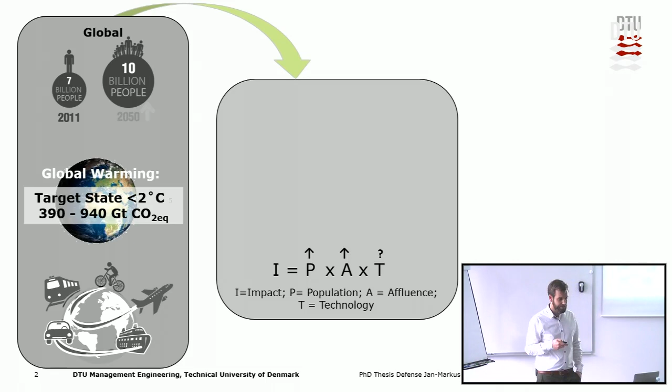And if we combine this now to the product which I'm focusing on around this PhD thesis, we can see it actually today how this works. So car companies are trying to introduce electrified cars now to the market, so they're changing their technology. But does it actually reduce the environmental impact by using the electrified cars?

Just to remember, over a life cycle, a car emits roughly 38 tons for 200,000 kilometers and 10 years. And if we look now at electrified cars, there will be a shifting from the use phase of the emissions to the manufacturing stage. But how much can we actually emit? That is the question. Which CO2 budget is actually allowed to have a stable or a lower impact to the environment?

That's the whole question of my PhD thesis: how we can combine the global aspects, the product, and the manufacturing, and how much CO2 emissions can be assigned to manufacturing.

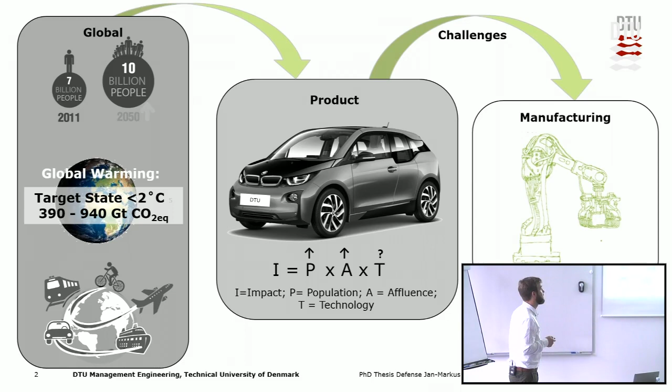Along this way, car manufacturers have to solve a lot of challenges ahead, like stakeholders asking for cheap production, or politics asking for the introduction of additional regulations and so forth.

And of course, we have to think about the rebound effect as well. Car companies are always striving for more cars - they want to sell more to earn more money. But this means additional emissions during production. So this is called the rebound effect.

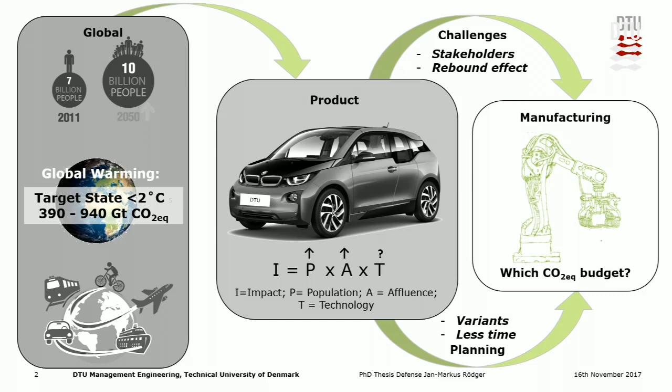And then we have the planning, which is important because we have to plan the production line according to this new CO2 budget. But car manufacturers are producing a lot of variants now. If you look at the Golf car 20 years ago, there were only 4 different variants, and now there are up to 100 available.

And then, of course, the planning should take less time - it's a kind of economical pressure from the stakeholders. So this is the whole background around my PhD thesis.

And now I'm getting into detail and would like to present the agenda. In the beginning, I will talk about my research approach, then the actual method development. After that, I integrate the method into current assessment methods. Then I will apply it in highly automated manufacturing, so I will generate actual results here. And then at the end, I will finish with the conclusion and recommendations.

So let's start with the research approach, which is always quite important in a PhD, to do some research. And I would like to scope my thesis a little bit.

As I mentioned before, I have dealt with the target states, environmental and economic, but I will focus on environmental or CO2 emissions in this presentation. So the first research question, which I solved in paper 1, is: how can sustainability be assessed in automotive manufacturing using the concept of target states? So how to implement 390 gigatons into the production planning.

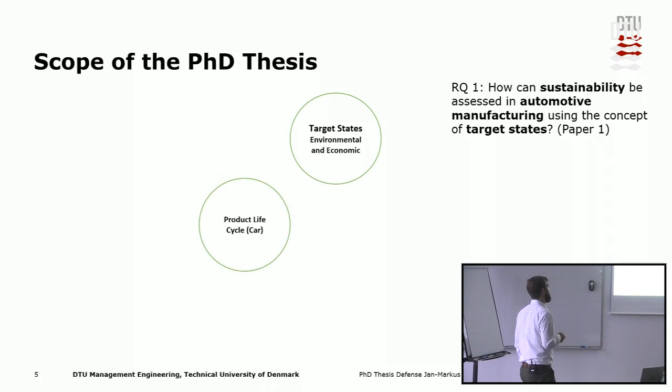The second part is the product life cycle of the car. It's quite important to implement this new thinking into existing simulation tools, because car manufacturers are using a lot of simulation and trying to speed up the planning process. So I've tried to integrate life cycle assessment into production simulation to avoid actual sub-optimization - so the burden shifting from one life cycle phase to the other.

And then we have the third part, which is about product and production planning. So I had to understand the production planning process in car manufacturing and how a target state for production can be integrated in the early phase of production planning.

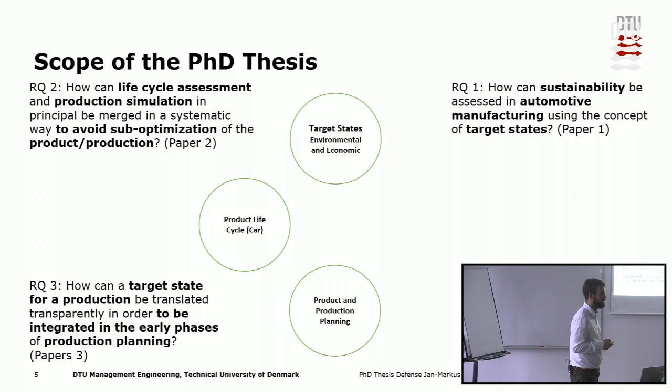And the last question is how I can actually assign these target states to the individual processes in a body shop production - so what CO2 budget should be assigned to robot XY somewhere in the production line. After I solved all these questions, I'm pretty happy that I've developed a sustainability assessment method for automated manufacturing. How I approached these 4 questions will be the content of this slide.

So the first part is the method development, and it's the answer to research question 1. I started with the aim of having a holistic framework for sustainable manufacturing. And I did a literature review in the beginning, gaining a lot of knowledge about how to assess sustainability in manufacturing. Then I talked to the partners in the AREUS project.

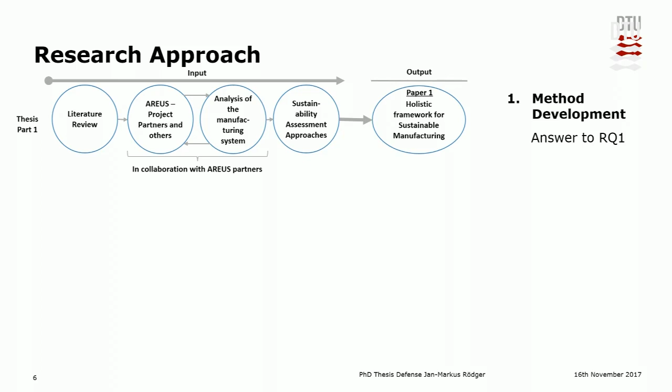The AREUS project is mainly a EU-funded project which lasts from end of 2013 until 2016. The idea of the project was to assess technologies in highly automated manufacturing, so it somehow fits pretty well to my PhD thesis.

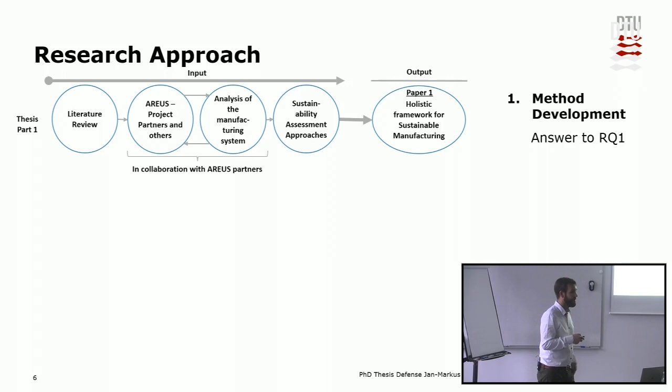And then I was lucky enough to analyze their manufacturing systems, so I gained additional knowledge. And then I added some sustainability assessment approaches, and at the end I had a holistic framework. But I will talk about this in detail later on.

The second part is the integration in current assessment methods - this method somehow has to be applicable. So I collaborated with TU Brunswick, and we combined life cycle assessment and manufacturing simulation in this part, and we were able to integrate this into current simulation software.

The last part, which is the most interesting part I would say, is the application in highly automated manufacturing. So I did a review of production planning of a body shop and collected a lot of primary data in collaboration with the AREUS project again and with the University of California. And then I integrated these two approaches and developed, at the end, an algorithm which can derive life cycle targets for the body shop.

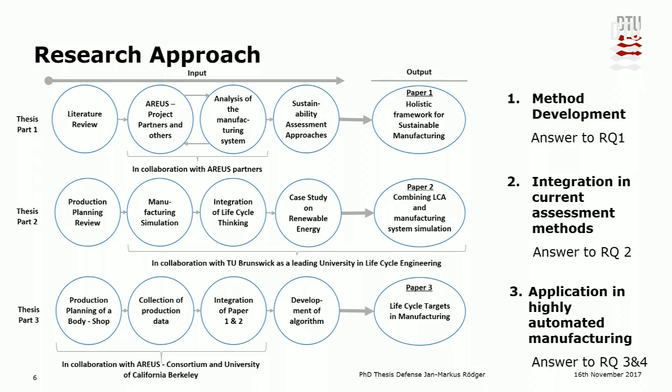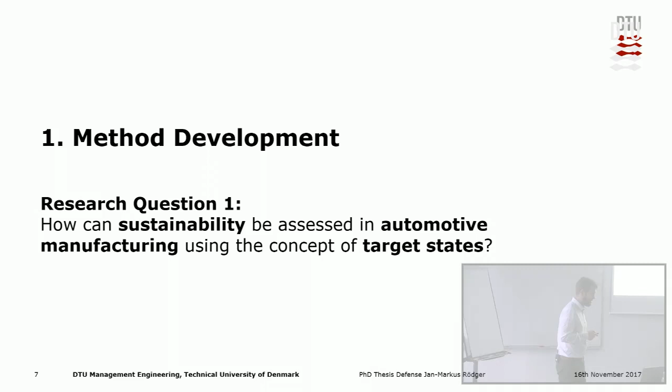So the question I would like to answer now is how can sustainability be assessed in automotive manufacturing using the concept of target states? For me, it was always quite important to work with industry, so of course we had the key partners of the AREUS project, which were KUKA, Daimler, and Siemens.

Along the way, I had the opportunity to talk about my approach with Tesla in California, with Danfoss as one of the partners in AREUS as well, but they were not really into car manufacturing, and then with Volkswagen, and they were pretty helpful. So I could mirror my approach and see if it's a good, applicable approach, because I wanted to develop an assessment method which can be applied in an actual manufacturing environment, and not just another method for the drawer. That was my idea.

Based on this collaboration, I was able to derive objectives for the new sustainability assessment framework. In total, I have derived four objectives. The new framework should address the full scope of sustainable manufacturing, meaning we should relate the impact of the product to the production development. Then it should reflect global targets, like the planetary boundaries concept, which somehow describes the carrying capacity of the Earth, so how much we can actually still emit.

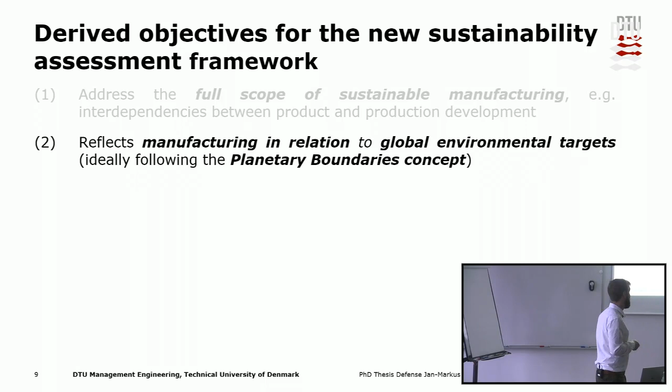Sustainability should be understood as a relation between three factors: the demand from the customers, the so-called functionality, the product, and the production system, but it has to take the life cycle perspective always into consideration. And then it should be able to integrate target states to the very last production station.

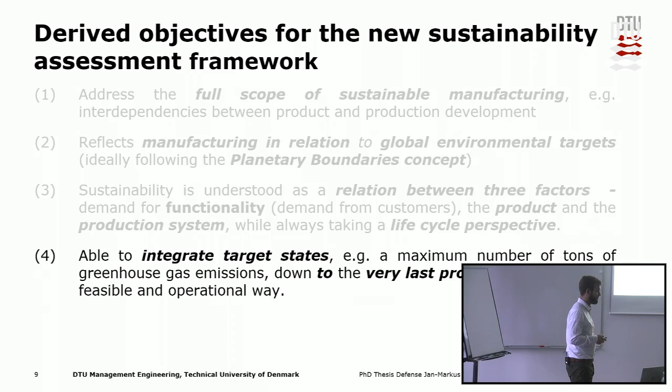The second part about the background of the new framework is the derived requirements from industry. So it should be aligned to the existing decision-making process, it should fit to the existing product and production planning processes, so it has to be a top-down approach. Then it has to be transparent, so that all involved managers know what kind of target they should use.

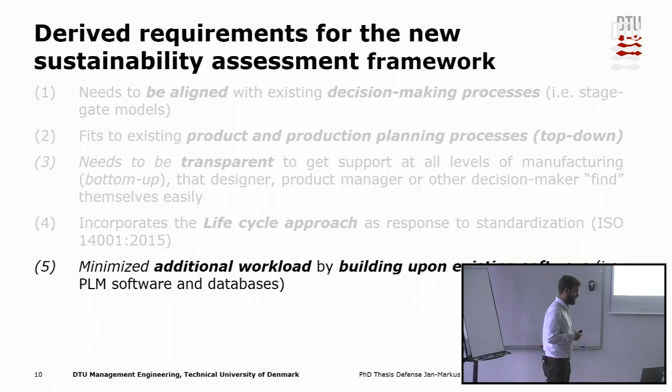Then it should incorporate the life cycle approach, because the latest ISO 14001 said that the life cycle approach should be considered. And then, which is quite important for car manufacturers, they don't really want additional workload, so it should be built up on existing software. There are a lot of product lifecycle management softwares available, and the framework should be integratable to this one. And cost-benefit ratio is kind of obvious for car manufacturers.

And the result is the so-called sustainability cone. If you remember that we should integrate the demand from the customers in this new framework, we're going to start here with a small customer, and you are asking for mobility, for example, as a function, or transportation.

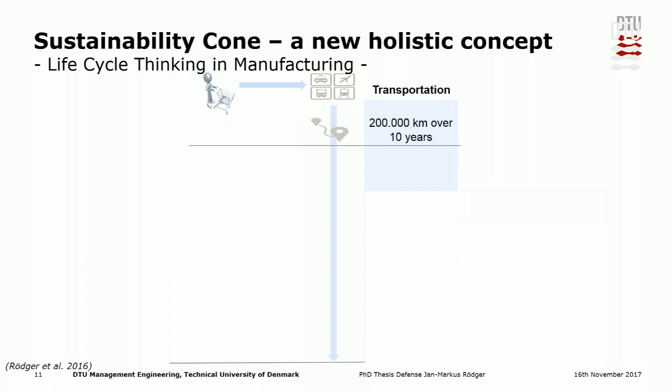This transportation has to be defined, so the functional unit has to be defined. The functional unit is quite important in life cycle assessment, so all the results are going to relate to this functional unit. For example, a functional unit can be 200,000 kilometers of individual transportation over 10 years, and this can be provided, of course, by a car, or maybe by an electrified car.

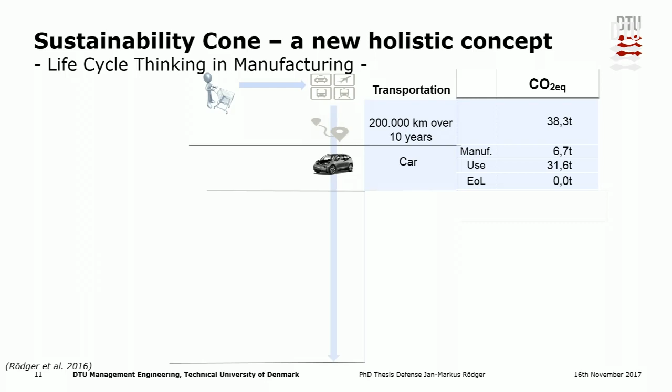And if we now integrate the life cycle concept, we can assess the environmental impact, which is represented here with the CO2 equivalence. You can see that a car emits roughly 38 tons over the life cycle. This number is based on 20 analyses, which were conducted by Volkswagen, Ford, Daimler, and so forth, and that's the median of it. The manufacturing stage contributes roughly 6.7 tons to the overall emissions.

The use phase is 31 tons, and end of life is 0, because most of the car manufacturers are taking the conservative approach, as they are quite unsure how many emissions can be saved during the end-of-life phase, or will be emitted. So most of the companies are saying, okay, we say 0 at this point. But the question is, how much is actually caused by the production system?

And if we remember, we would like to introduce these numbers in the planning phase. So how should you know how many emissions are produced or caused in the planning phase? If we go through here, the car body will be produced in a body shop, and the body shop consists of several sublines, like the underbody line or the side member line. Then you have a lot of different technologies to join the different parts, and at the end, there are a lot of robots in this car body production.

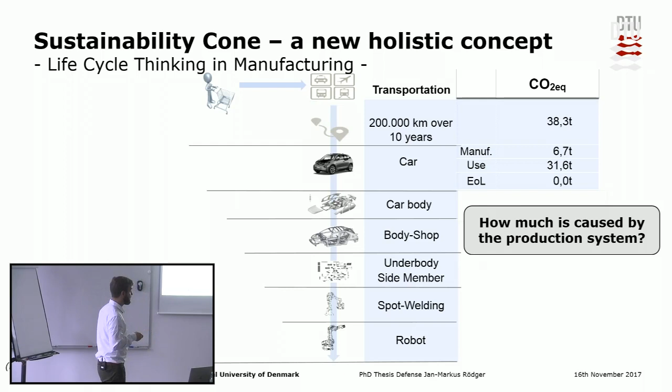To visualize all these, I've developed the so-called sustainability cone, which represents the functionality, the functional unit, as the first level, and everything is related to the functional unit. These arrows indicate the life cycle at each stage. On the far top are the product specifications, and down here the production parameters. From the top down to the lowest level, there are a lot of decision-making processes happening.

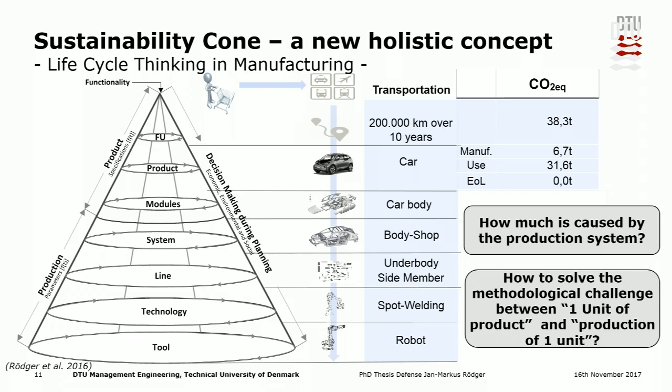This is the backbone of my thesis, so I try to visualize the interdependencies between the customer and the robot. But there's still a methodological challenge: how can we solve the barrier between the module and the system? Here we are assessing a unit of product, and here we are assessing the production of one unit. It's a methodological problem which I would like to solve later on.

So the intermediate outcome of the method development is that the sustainability cone has been designed for industry. It incorporates the existing stage-gate model, represents the existing top-down decision-making approach, and reflects the iterative and overlapping product and production planning. So if some products are changing, you can go a level up and decide how to adjust the carbon budget. It embraces the target state concept, so absolute targets can be implemented, and it's able to visualize potential sub-optimizations between the different levels.

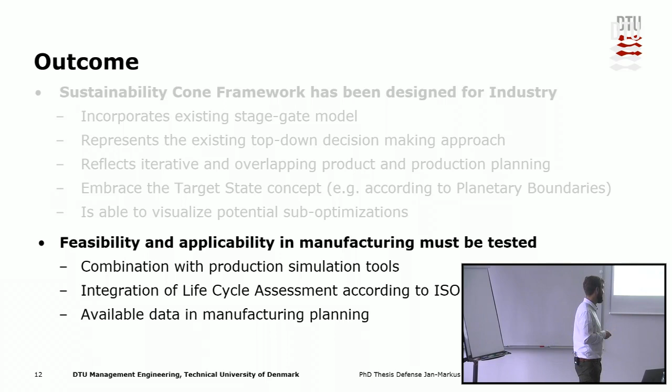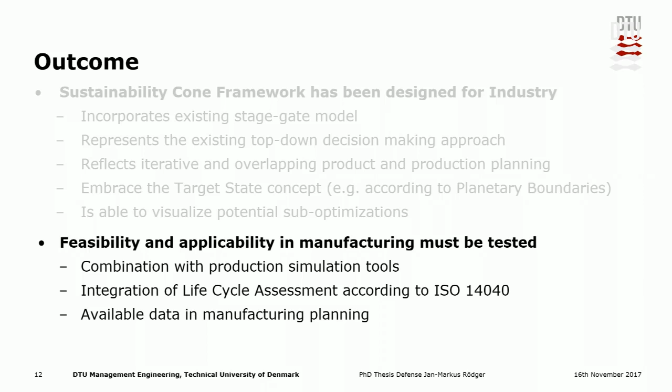The feasibility and applicability in manufacturing must be tested, which I will do in the next slides. So the combination with production simulation has to be tested. The integration of life cycle assessment according to ISO 14040, and the available data in manufacturing planning, has to be tested—or we have to find out if there's enough data available at this point.

So the second part is about the integration into current assessment methods. How can we merge life cycle assessment and production simulation to avoid sub-optimization?

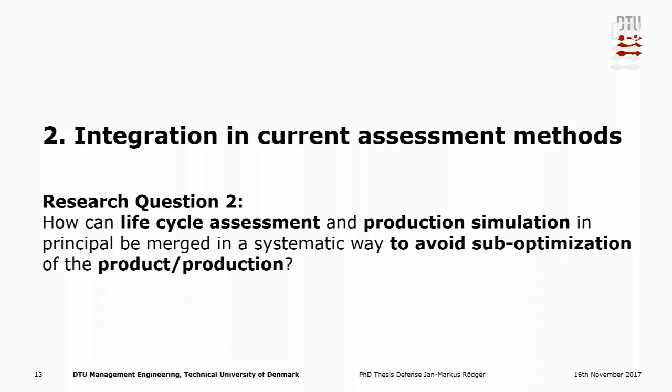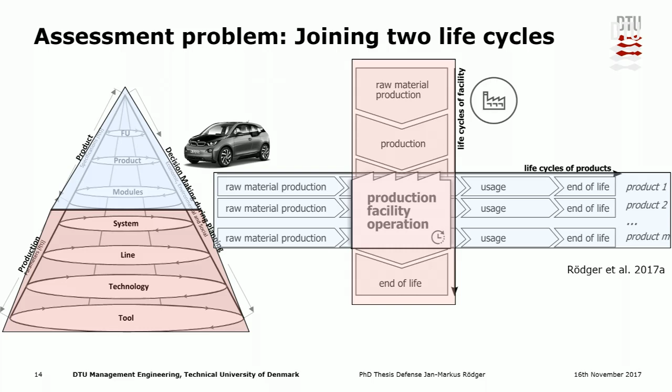So the sustainability cone again, with the product-related specifications up here. And if we look into detail, we can see the life cycle: the raw material production of the different components of the car, the actual production in the facility, the use, and the end of life of the car. But if we want to combine it now with the production parameters, we have the problem that we have two interfering life cycles. So the question is, how can we overcome this barrier in a systematic and applicable way?

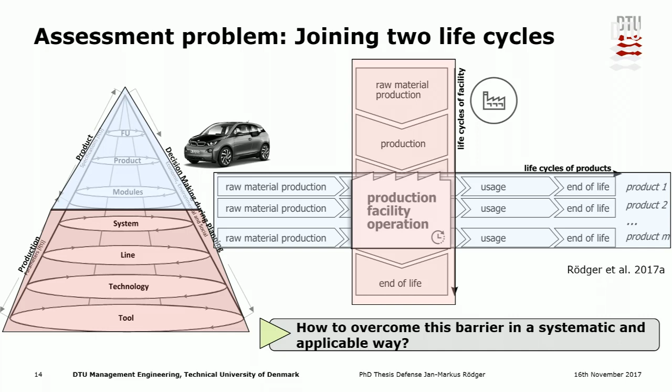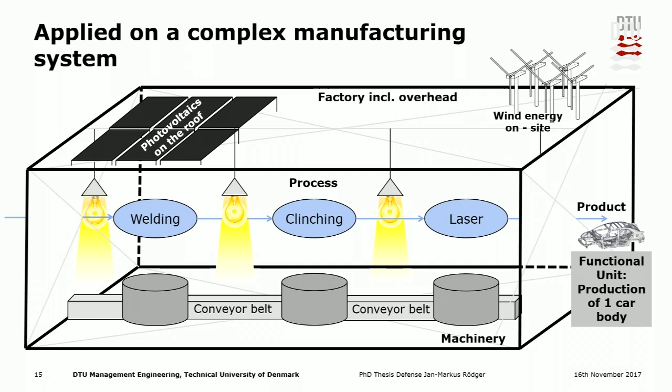And of course, there's another major impact: the machinery. If we think about the complex production of car manufacturing, we have a lot of machinery in there, and there's a lot of environmental impact. We have to consider this as well and align it to the functional unit. How can we do that in a handy, applicable, and feasible way?

That is what we did with the new holistic and applicable assessment method. We developed this together with TU Brunswick. If anyone is interested in manufacturing simulation, you should go there—it's a pretty good group.

We started with the idea that we want to combine manufacturing simulation as the driving force, because industry is always looking for improvements in manufacturing, in the actual production line. So we said, okay, that is the driving force right here. We're going to simulate the manufacturing system, and we will get some energy data out of it. But if we remember the whole factory picture from the slide before, we have to add machine tools and equipment as well, and HVAC and lighting, to get the full picture.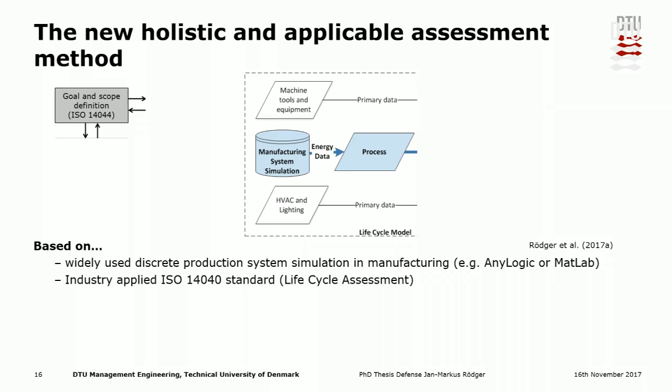And that is why we use the life cycle assessment approach. We defined the goal and scope, and this is more or less the life cycle model. The next part of a life cycle assessment is to have a life cycle inventory. How did we do this? We defined some parameters which somehow pull all the information, based on the predefined functional unit, out of databases.

So, for example, if we have one photovoltaic unit on the roof, the actual CO2 emissions are stored here in this database, like ecoinvent or GaBi. And then the manufacturing simulation says, okay, I need this specific share of one unit of solar panel, and then we have assigned it to this. This happens with all the other machinery as well, depending on dynamic aspects and so forth.

But this would be a whole other presentation if we talk about this. At the end, we have to add that the result of this is actually a material flow analysis, so an inventory, and we can assign the environmental impact assessment at the end, using a midpoint assessment method based on CML. By this, we were able to assess 5 different impact categories for these kinds of manufacturing systems.

So, at the end, of course, there's an interpretation of whether these results make any sense. The outcome, I would say, for merging these two approaches, is that the challenge of two interfering life cycles is solved by using the functional unit approach, assigning everything to the functional unit. But it requires substantial knowledge of the process because everything is manual so far. It's not automatized, and we haven't integrated it into PLM systems and so forth.

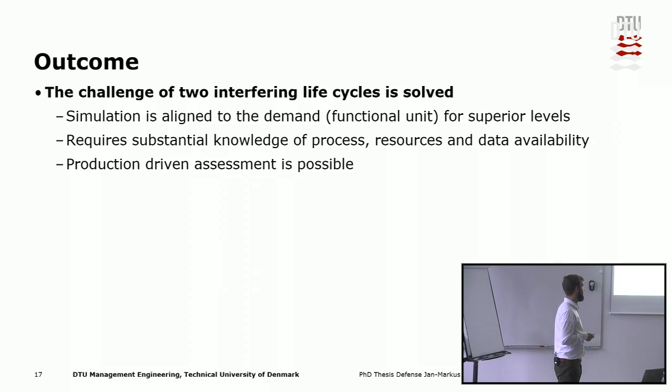And we can say that production-driven assessments are possible, and we can basically avoid sub-optimization between manufacturing, overhead, and the process. So we have the full picture and can see the different shares, for example different shares for machinery and infrastructure, direct energy consumption, or indirect energy.

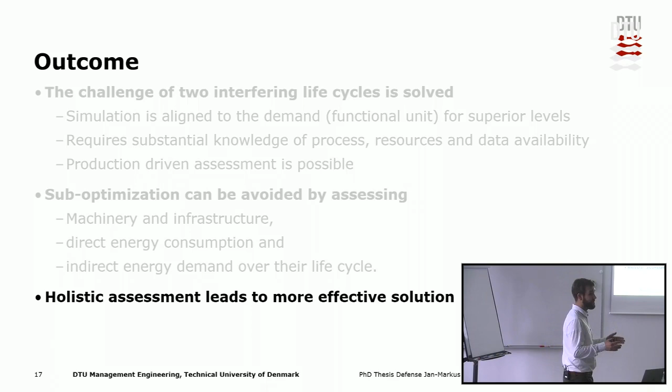I would say it's possible to have now a holistic assessment, and this actually leads to more effective solutions, which I think is quite important because efficiency improvements in manufacturing don't always lead to effective solutions. So if you, for example, integrate renewable energies into the production system, you need storage systems, which have additional environmental impact. By this approach, we can see the whole picture and say, okay, efficient solutions are not always effective.

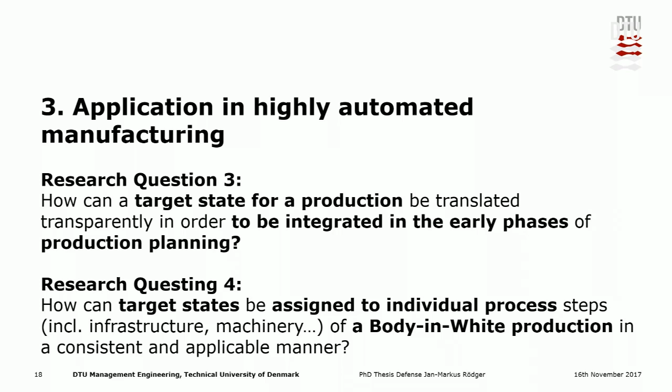And the third one is now the most interesting part, I would say. It's about the application in highly automated manufacturing. We have to answer, or I would like to answer, two questions here. How can a target state for a production be integrated in the early phase of production planning? We would like to understand how production planning works in car manufacturing. And the next question is how we can integrate target states and assign them to individual processes, so we can use life cycle target setting in production planning.

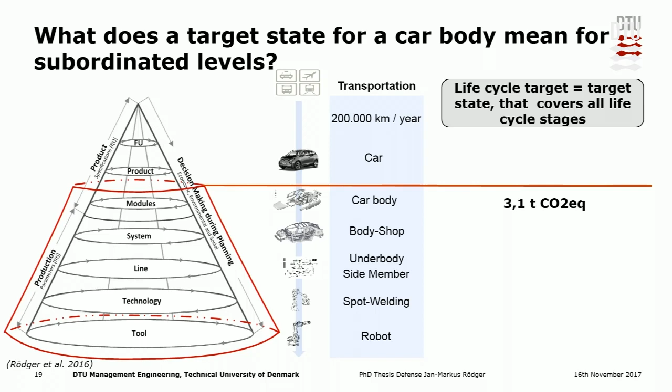And to understand the case I will present later on, I would like to focus now on this area. So the car body will now be the case, and the car body is produced in a body shop, like I said before, with an underbody line, spot welding, and robots. And if we assign now a life cycle target here to the car body, or I would call it from now on life cycle target because it includes the whole life cycle of the car body, what does it mean for the robot XY at the end of the line? So how can we allocate this in a transparent and consistent way?

So if we look now at a typical stage gate model in car production, we can see here the whole flow, more or less, the strategy development here, and the start of production up here. In general, I would say it takes roughly 60 months from product concept to the start of production. But of course, they would like to shorten it now, so it's maybe 4 years.

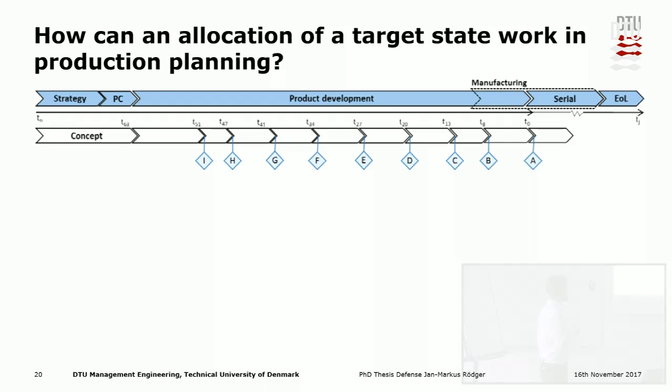But just to understand, first of all, there's a strategy development. So what kind of car do we need for the different markets? What are the customers demanding? What kind of car? SUV is a huge topic now, so they're producing all the utility vehicles. And the next step would be the product concept, that is what you see at all the different car fairs in Frankfurt and so forth. There are a lot of nice concepts. And then actually the production planning takes place.

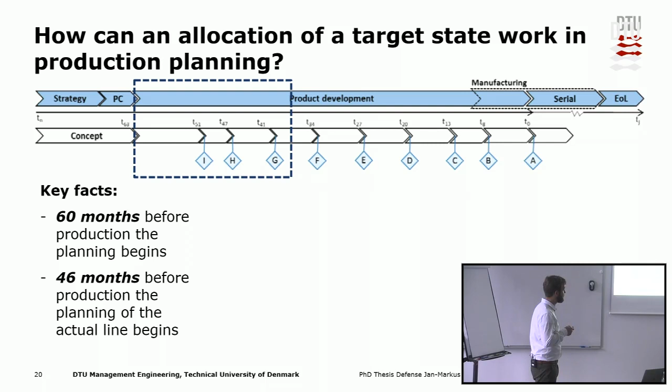So that is between the 60th and the 46th month before the start of production, and that is where I would like to implement my allocation method. This is a little bit wrong here, I should move this to month 46, I'm sorry about that. But to understand the production of a car, I would like to show you this graph.

Usually the production starts in a press shop, then the body is produced, then it moves to the paint shop, then the powertrain will be attached, and then the final assembly.

These are the 5 steps. But I will focus on the body shop because it is the second biggest energy consumer in car production after the paint shop.

But there's a lot of infrastructure which is used. So if we think about all the robots in there and so forth, they need a lot of area. If you go to a car manufacturing facility, there are robots everywhere, more or less.

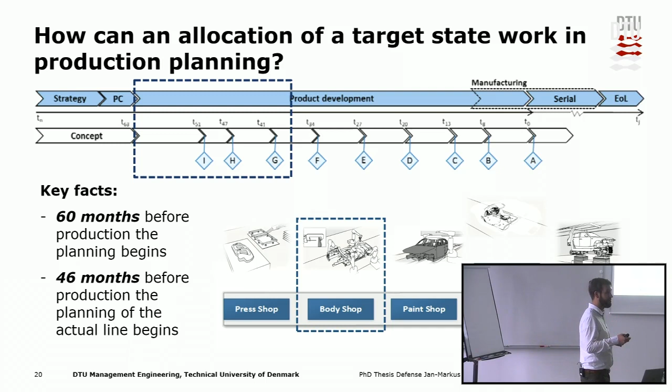On the other hand, the body shop is one of the key competences still from the car manufacturers. So they are producing their actual car. They are not giving that to external partners and so forth. They're still producing that by themselves. So that is why I chose the body shop.

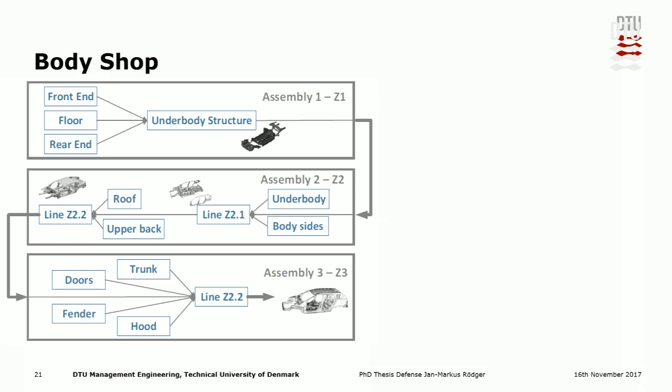And of course, I could collect a lot of data in the AREUS project. If we look now at a body shop, it's usually separated into 3 different lines: the underbody structure, the assembly where the underbody is joined with the roof and the upper back, and at the end, the doors and the fenders are attached.

To give you an overview how this actually looks like, we can say that in general, 500 different parts are joined along this process. Up to 500,000 cars can be produced in this kind of line, but I would say it's between 250 and 500,000. The cycle time ranges between 40 and 60 seconds.

So every 60 seconds, a new car body is coming out of this line. The degree of automation is 98%. And the availability has to be higher than 95%.

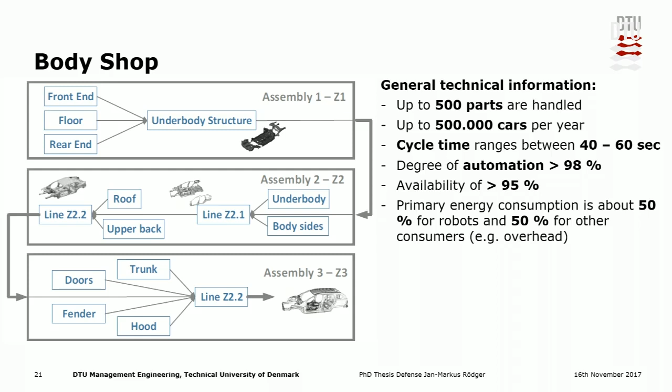If we talk about primary energy consumption, we can say that 50% is due to the movements of robots and 50% for other consumers. If we now look at the robots, we can say that in total 1,200 robots are installed in this line, and it's increasing.

If we look at the International Federation of Robotics, they said that 6 years ago there were an average of 700 robots installed. So every product cycle there will be more robots. I don't know where the end is, but 1,000 robots is a lot. And if we think about that a robot has a similar carbon footprint like a car, it's huge. It's a huge impact.

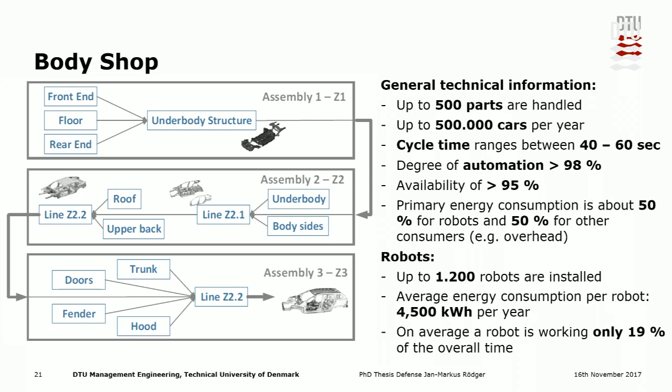The average energy consumption per robot is 4,500 kilowatt hours per year. It's roughly 1.5 households, I would say, just to get an idea how much it is. But it only works 19% of the overall time. The reason for that is the organization of the production line to secure the highest availability.

If you look here at the core line, zone 1, which is working almost 24/7, the robots are working all the time. And so there's a lot of energy consumption here.

We can have a look here now at zone 2, where medium parts are joined to larger parts. So they are actually providing all the time products to zone 1. Then we have a logistics area around here, so some products are coming from external sources and so forth, and they have to be integrated here.

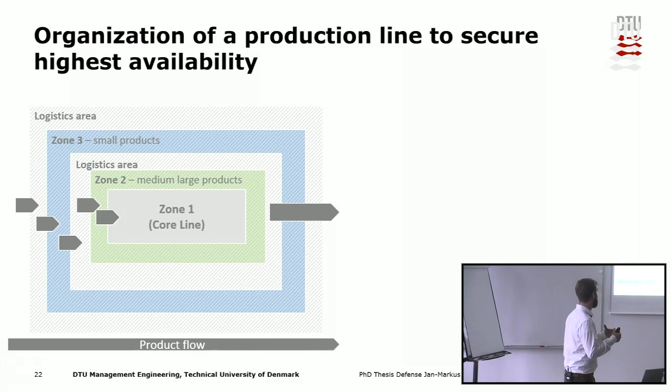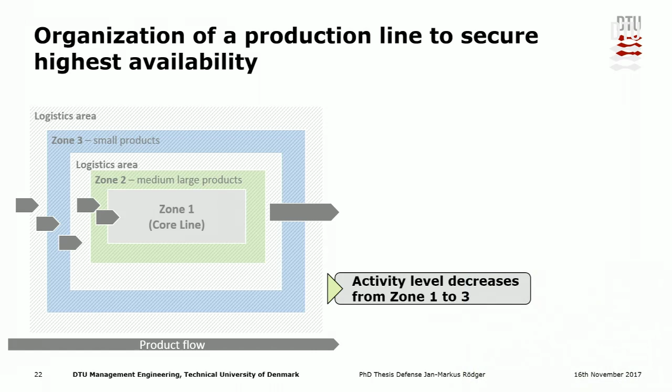And then we have the small parts around here, where most of the employees are actually still working. They are providing, say, a small metal sheet to process with their hands. So we can say that the activity level decreases from zone 1 to zone 3, and on average, only 19% of the time the robots are working. But if we're thinking about here, it's almost 100%. And this is how it would look like in the real world.

Here in the middle, you can see the high robot density. That is zone 1, the core line. Then we have zone 2, which actually provides some parts. And then we have zone 3, where you can see some low-cost automation, which are called in the data sheets from the car manufacturers LCA.

So there was a huge confusion when we made the first workshops. We were going to talk about LCA, and then we started with life cycle thinking, so no one knew what we were talking about because they expected we're going to talk about low-cost automation. So that was quite funny at Daimler.

Anyway, we can say a lot of infrastructure, machinery, and area is needed. You can see it here. But for my carbon budget allocation, I need, of course, some data. And that is what I would like to talk about now.

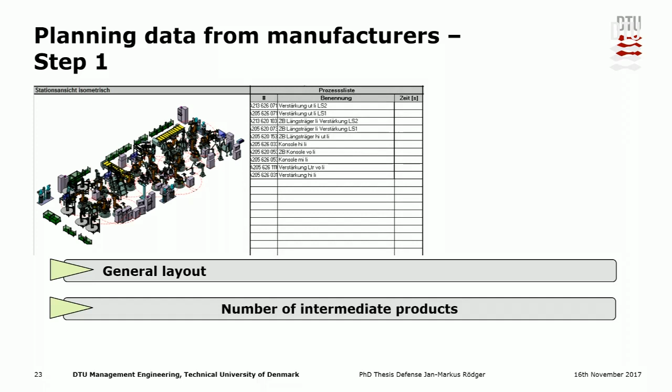The OEMs, the car manufacturers, have a general layout available between the 60th and 46th month. So I'm getting this kind of overview, and they're actually saying what kind of intermediate products are handled in this line.

And then they describe the general product flow, so how are they going to join all the different components here. So the joining sequence will be described.

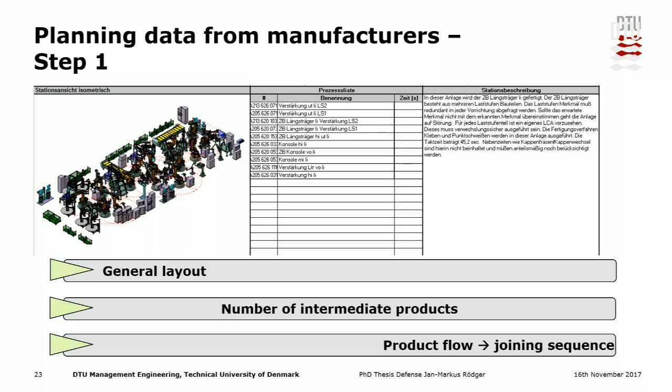You can see here some numbers, for example, the cycle time of 45 seconds. I have to extract these numbers somehow to get my allocation method.

But there's more information available if we are looking more into detail. They even describe the different subcells here, and they say what kind of components are used in this area. So Modul Rob Punktschweißen means robot spot welding. This is maybe this one. And then we have a table, which is this one. So I'm getting a lot of information about what kind of machinery is used.

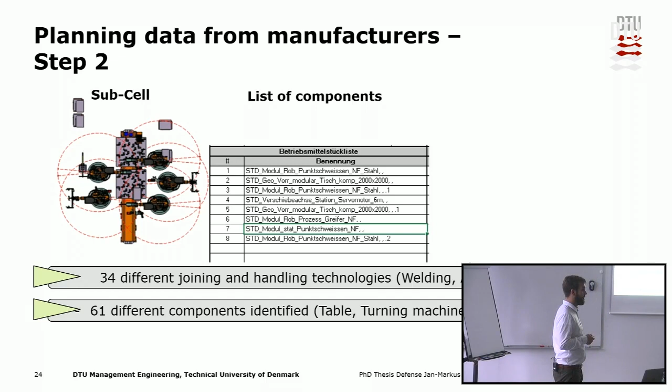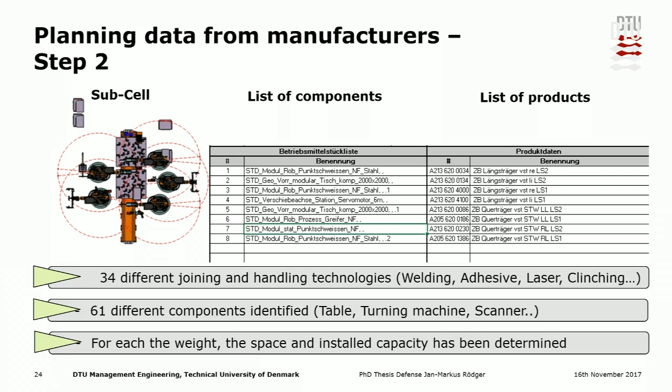In total, I was able to identify 34 different joining and handling technologies like welding, adhesive bonding, laser, and clinching. And then 61 different components were identified, like tables, turning machines. But there was no weight assessed to the different components, no space or required space they need, or installed capacity, how much electricity they will use. So I had to look up all this in the different product sheets and assigned all this information to the different components here.

The next part is, the idea was actually to develop a method which is applicable to product lifecycle management tools, simulation tools, to increase the applicability. And in these software tools, it's usually separated. The information is usually separated into 3 parts: product, process, and resource related.

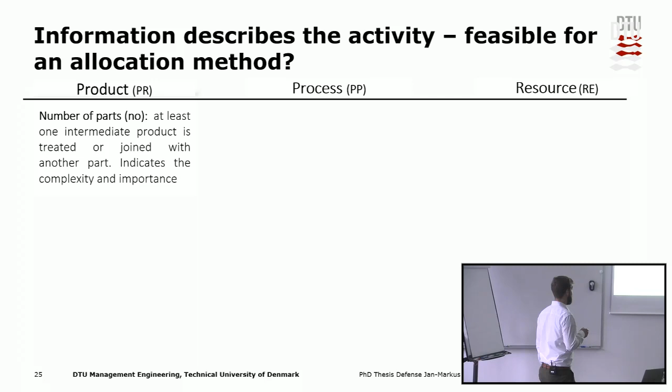And I wanted to assign my data, which I've collected in the data sheets, to those. So product related, I have the number of parts which I handled in this process. Then I have the weight of the different products and the dimension.

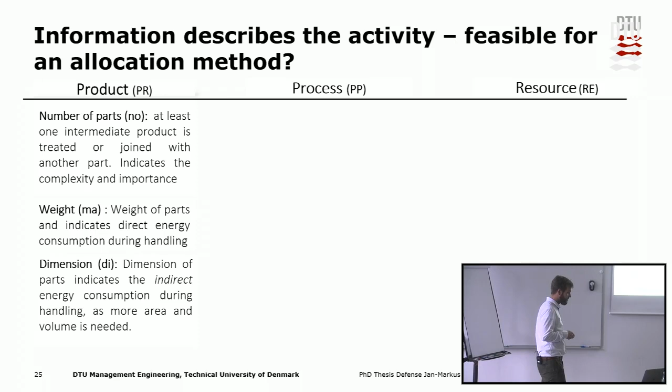And the process as well, where I have process data, the cycle time, the joining sequence, and the joining equivalent. The joining equivalent is kind of key for my assessment because it compares 2 different joining technologies based on a specific number.

If we look at spot welding with a specific stiffness for one spot, and we want to use another technology like laser, how much laser do we need to get the same stiffness? So the car manufacturers invented their own equivalents, and for laser, for example, we need 10 millimeters of laser to achieve the same stiffness as one spot weld. So it's possible to compare different technologies.

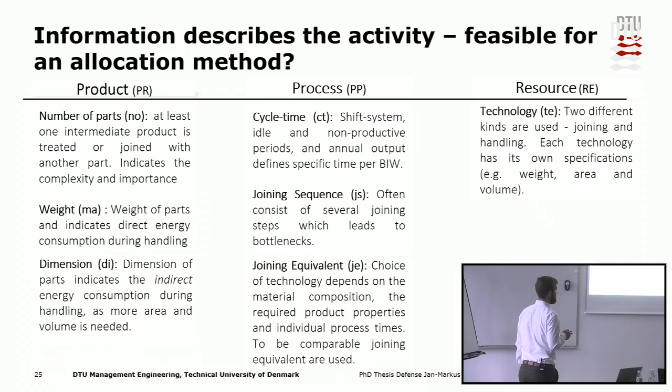If we talk about resource-related data, we have the technology. Two different kinds are used, joining and handling. And then we have the components, like tables, fans, and so forth. And we have the employee, which I mentioned here in these data sheets as well.

Then I said, okay, how can we describe the new allocation method? And I said, somehow all the data describes the activity of the different lines. So I called it activity-based allocation, a top-down approach, because I'm getting the data from the whole line, and then further down, it's a subline.

The allocation method integrates a typical production line structure, so line 1 to 3, and all subordinated levels. It defines factors for product, process, and resource-related activity, and it's more or less compatible with PLM system architecture because of the clustering.

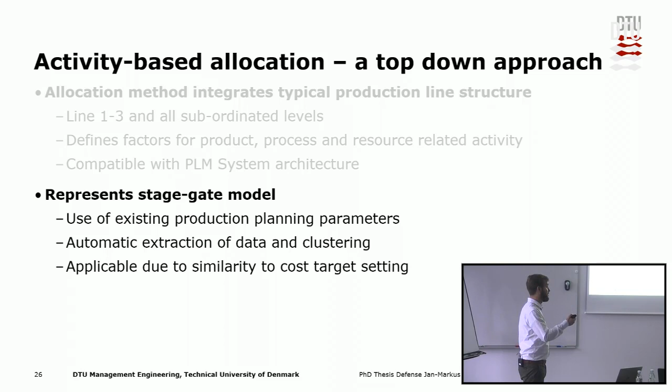It represents the stage gate model, so somehow I use all the data from between month 60 and 46, and I'm only extracting data which already exists, and it's an automatic extraction. In a huge Excel sheet, I put all the information, and then I just press the button, and all the information comes out.

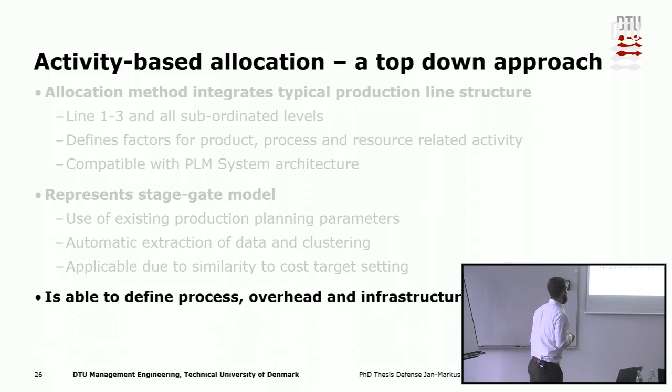And it's applicable due to the similarity to cost target setting. If we think about how a car is planned, you always have a financial budget on top, and then it will be allocated to the different lines or to the different managers. So my kind of thinking is almost the same. And it's able to define process, overhead, and infrastructure targets. And it encompasses life cycle assessment.

But this is a lot of talking now, so I would like to use all this information here in this case study. It's a quite easy one.

So if we look at line 1, which I've shown you before with zone 1 and zone 2, and line 2, which looks quite different. And we say, okay, we have a carbon budget now available, and would like to somehow split it. So how much of the target stage should be assigned to each of them in the planning phase? So we know if the product line developer is in the right direction to fulfill the target state. So that's the question: can the available data be combined to arrive at a profound allocation factor?

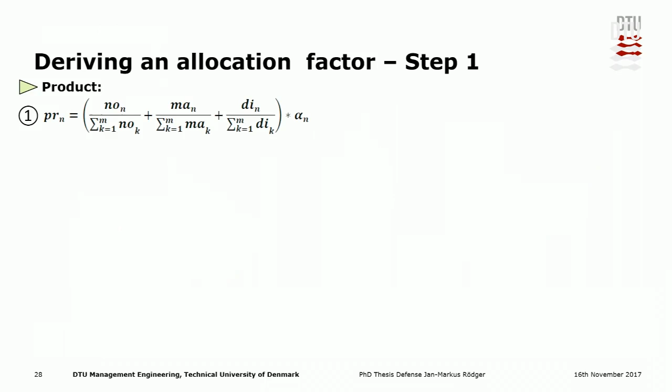These are the main questions. Now it's getting a bit cryptical, but I hope you're fine with it. So if we look at this formula here, it describes somehow the product activity.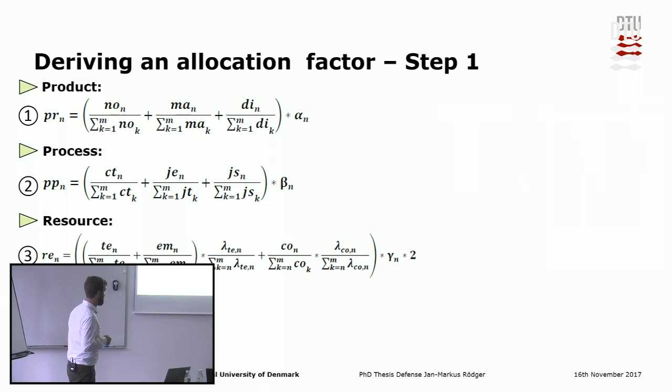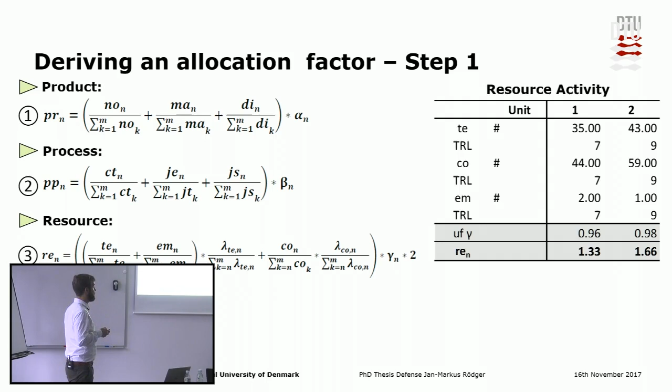Resource related is a bit more complicated, because we have to consider energy consumption and so forth as well. But in general, it's the same approach. So we looked at the involved technology, involved components, and the employees. The employees are treated equally to technologies - one robot equals one human. At the end, we have a resource activity allocation factor of 1.3 for line 1 and 1.6 for line 2.

We need an additional factor to somehow consider the resource intensity. So I've looked at the different weights of the different technologies. I identified that the weight of the machinery is 32 tons in line 1 and 43 tons in line 2. In total, they consume 250 cubic meters compared to 335 cubic meters in line 2. And line 1 consumes 1 megawatt hour compared to 1.3 megawatt hours. So technology activity is allocated with 1.3 to line 1 and 1.7 to line 2.

So I'm happy to say that for each cluster, line, cell, an individual activity-based factor can be derived.

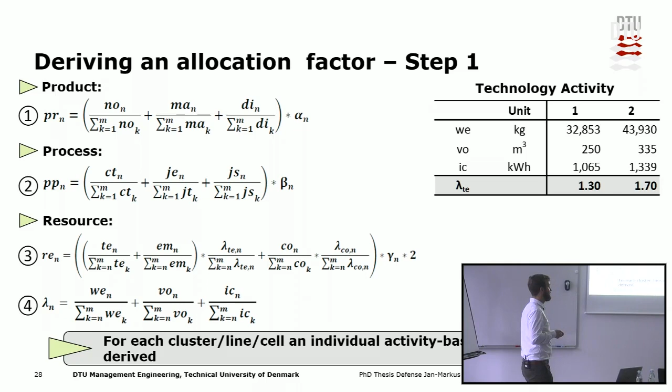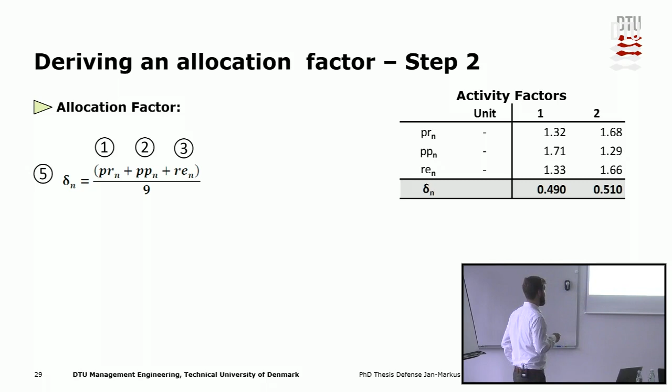Now we have to combine these three factors. Just to remember, these are the different factors. We add them and divide by 9 because they are treated equally - I was not able to say the product is more important than the process, or the resource is more important than the production parameters. Of course we can change this later on, but it's not up to me - it's more to the internal decisions of the car manufacturers.

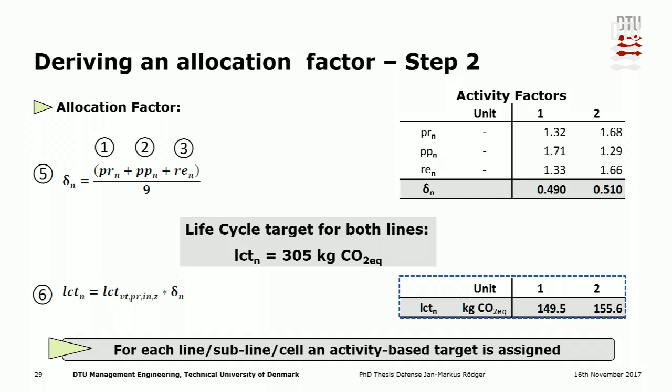So we have the life cycle target for both lines, and then we apply this allocation factor. We can say line 1 is getting 149.5 of the carbon budget, and line 2 155.6. So for each line, subline, cell, an activity-based target is assigned based on all the planning data we have.

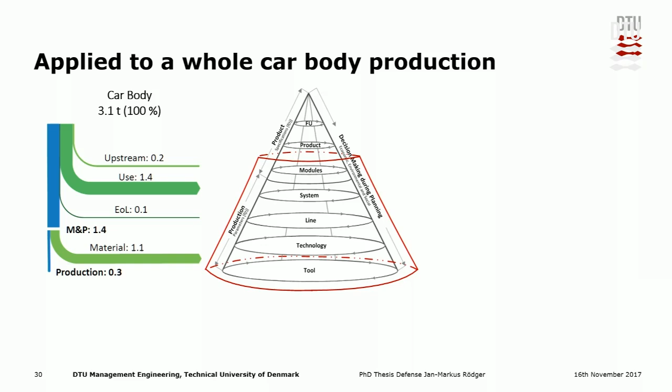If we look now at the sustainability cone again and apply this thinking to the whole chain presented before - we started with 3.1 tons of CO2 equivalents. Sorry about the missing CO2 equivalents here. We can allocate based on different data the different flows, but we always have to follow the blue one.

I don't want to get into detail, maybe we have the opportunity later on to talk about this. But now we talk about the production itself. If we look at the system and line, we have the 305.2 kilograms, which I presented before. Based on all the information, I assigned another target because it's a different line.

And I've split them a lot here, but the idea is I want to get even a level further down. So we're now on line level, then technology is down here with 3.7 kilograms, and the technology is basically spot welding. So I was able to derive different targets here - some are attached to stationary production, and some are attached to robots.

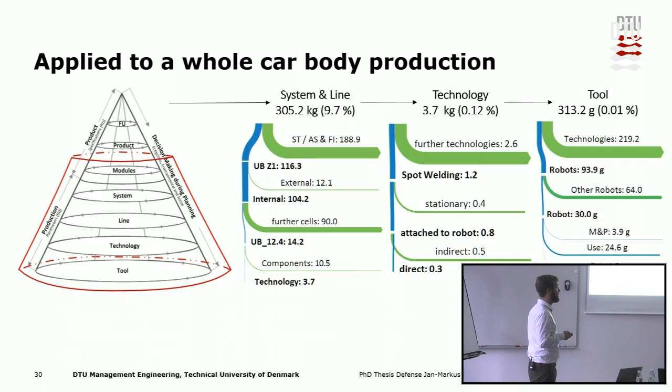So I was able to derive different targets as well. But at the end, I was able to derive the life cycle target of a robot. And it's quite consistent because I'm always using the same data which is available at this planning stage.

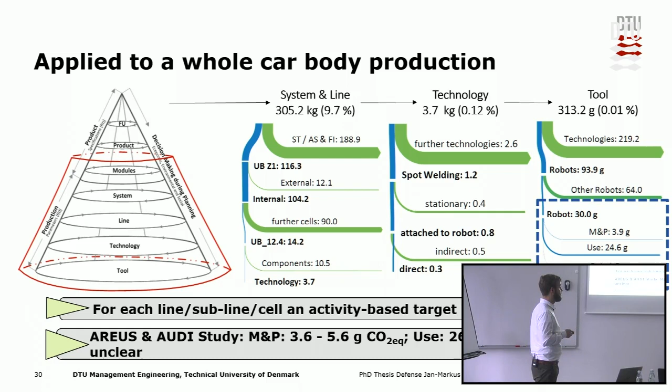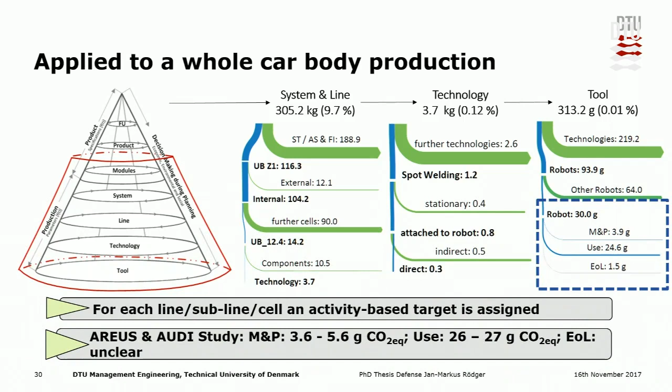If we compare these top-down results, where I used all the planning data, with the bottom-up results from our AREUS project or another Audi study, my results are quite good: 3.9 grams CO2 equivalent per functional unit for material in production, while the AREUS and Audi life cycle assessment says it should be between 3.6 to 5.6 grams. For use phase, I get 24.6, and they say 26 to 27. The difference might be due to a different assumed cycle time or slightly different movement. But overall, I'm getting into the right direction.

Now I'd like to conclude and make some recommendations. First, on method development: the framework has been designed along the existing stage gate model, representing how car manufacturers combine customer demand with product and production. It supports effective planning in an applicable and consistent way, and visualizes the interdependencies on several levels, including the life cycle approach and integration into current assessment methods.

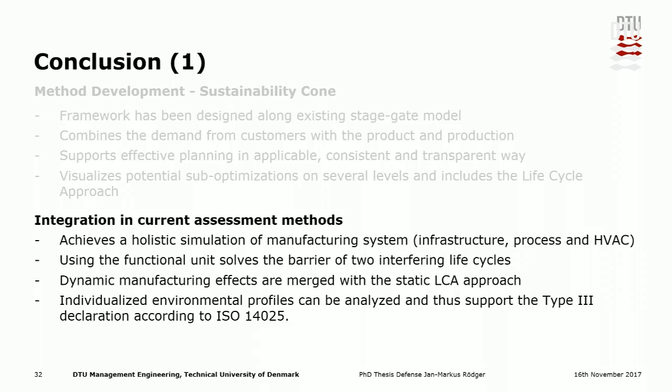Due to combining manufacturing simulation and life cycle assessment, we achieved a holistic simulation of manufacturing systems, using the functional unit to overcome the barrier between product and production. We integrated dynamic manufacturing effects, like provision of renewable energies depending on time of day, and individualized the life cycle assessment to provide product-specific results.

Conclusion two concerns application in highly automated manufacturing. The two-degree target can now be broken down at the early stage of production planning, and we can assign targets to individual processes. This is based on typical available data in automotive companies at a very early stage, and we can integrate the algorithm into existing planning tools, providing information according to the PLM system structure. It enables managers and planners to keep focus on effective solutions rather than just efficiency improvements in their specific field, allowing decisions to be analyzed holistically and address potential trade-offs.

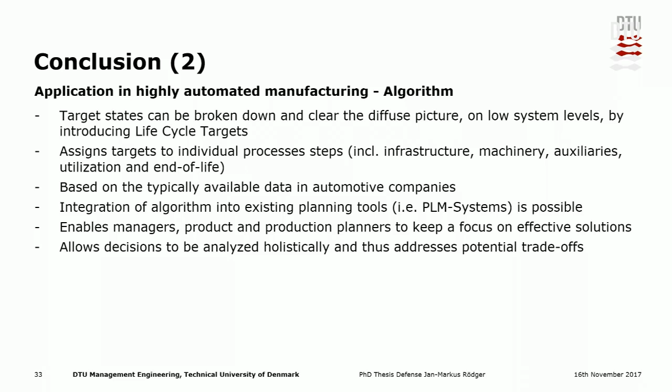Limitations are always there—I always needed more time and more case studies, but I'm quite happy, since the goal was to develop an applicable method. However, there was limited data. I always asked for more data from car manufacturers, but they're not so easy with data sharing. I'm glad I got data from the AREUS project. The approach is based only on AREUS and the support of two further OEMs, who confirmed my approach sounded reasonable, so I haven't developed the method in a completely wrong direction.

The focus was on European circumstances, and I developed it only along body shop production—maybe the approach doesn't work as well for the paint shop, but that could be another topic. The combination of life cycle assessment and manufacturing simulation was tested manually; actual implementation in a production development process is missing. We tried that with Delmia, one of the partners, but there was a lack of time. Another drawback is that I only focused on global warming potential and primary energy demand, due to missing time and lack of industry data. So burden shifting between different impact categories cannot be excluded by my approach—only between global warming potential and primary energy demand.

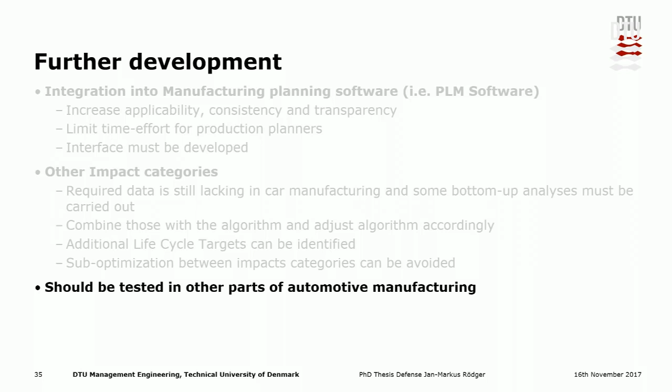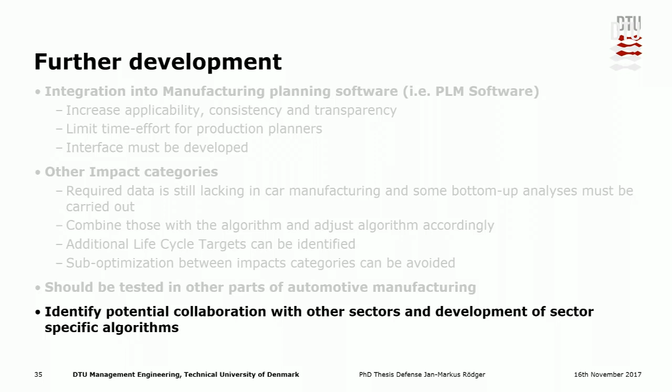For further development, I'd like to integrate this into manufacturing planning software to increase applicability and limit time effort, and look at other impact categories, though that needs additional data from car manufacturers—so we should set up an industry project with different manufacturers. I'd like to combine new data with the algorithm and adjust it accordingly, improve or minimize sub-optimization between impact categories, test it in other parts like the paint shop, and identify if this kind of thinking is applicable to other sectors, developing a sector-specific allocation factor.